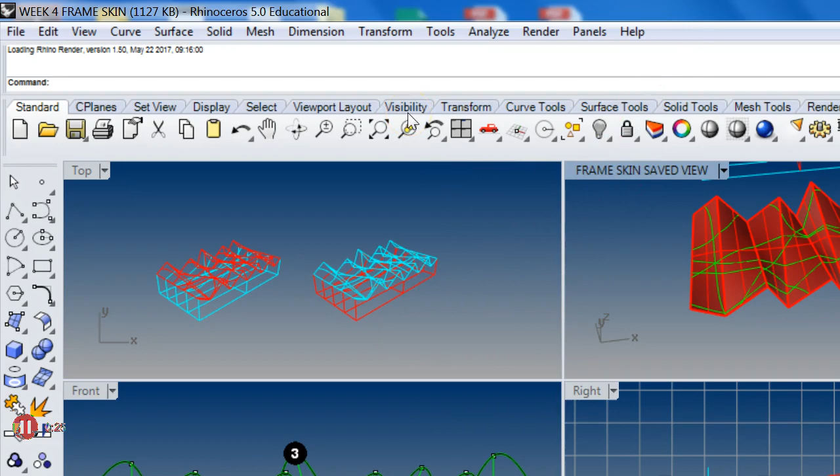All right, so I'm opening back up the file. Let's take a look at the assignment, but what you need to do for Monday is basically, what's due? Page 3, unfolded flat laser cut drawing, kit of parts drawing with labels and numbers showing skin and frame pieces. So I'm going to show you how to do that. It's maybe a bit more involved than it sounds, but we're just going to go through that process again.

There are two things that you need to unroll, right? Where's my frame? Did I hide it? Here it is. We need to unroll this and this. And this we were able to do pretty easily, like that. So I'm going to quickly show you how to unroll something like this.

And unrolling it, flattening it is not the issue, but as my studious student Nicole pointed out, these are intended to slot together. So the intention of digitally fabricating something is that when you're done, you shouldn't be having to use a knife to then cut additionally. You should program all those cuts into your model. And when it's laser cut, you're really just fitting them together.

Did you ever use Lincoln Logs as a kid? You know the game Lincoln Logs? That's why you're all architects, because you played with Lincoln Logs. And your brothers and sisters didn't.

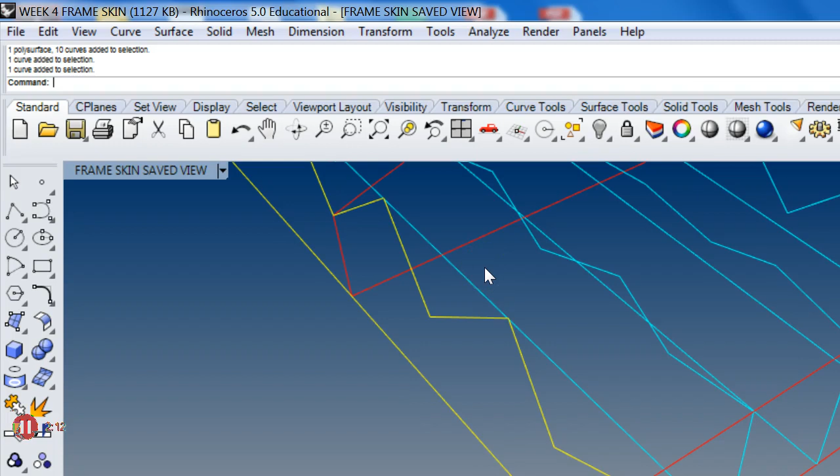Here we go. So these are impossibly thin. These have 0 thickness. What thickness chipboard are you going to use? 16th? So we want to give these some thickness. Let's go to our top view. Okay, two things. We'll go over this again. We'll unroll that one more time. But here, let's copy this over.

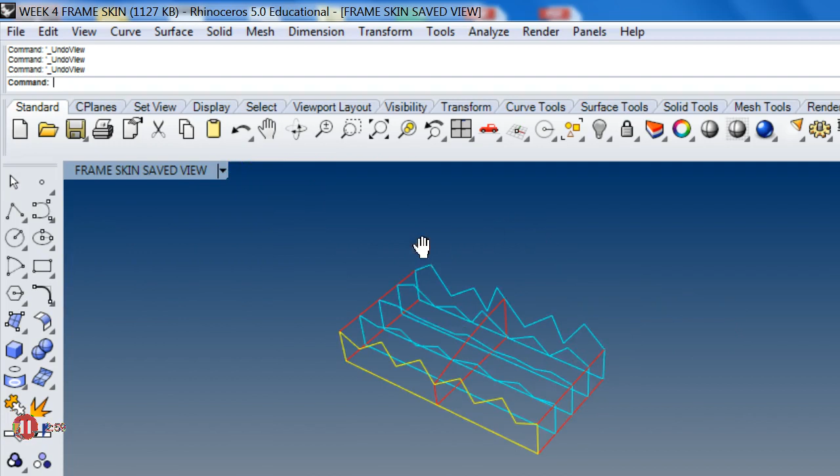And we're going to do two things. One, we're going to give this some thickness. And then we're going to unroll it. I'm going to show you how to notch these things out, like Lincoln Logs. Here we go. All right. So these are currently, I think we made planar surfaces. Remember that? Go to my perspective view. I think we just duplicated the borders, just the boundaries.

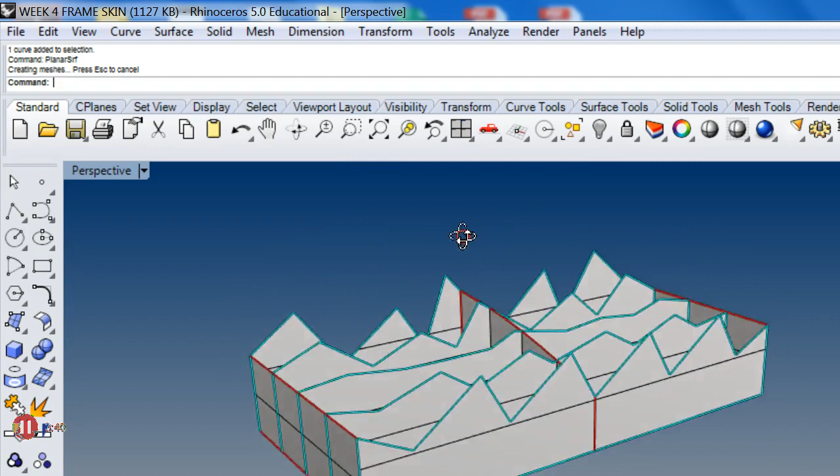How can we get a surface back from a curve? If they're flat, we can type planar surface, right? Because this is a planar curve. Planar. Can you all see it up there? PlanarSrf. Okay. And then I can just repeat each one of these. Okay, something about planar surfaces. So you're going to build a model that looks like that, right? I want to show you something.

Okay, so you can always go back and forth between surfaces and curves, which is a useful thing to do. So here we have a surface, and how can I extract the curves from this? It's two ways of defining the same geometry. So one thing I'm going to do, I don't have to do this, but I'm just going to explode it. And then you see I have these individual segments. And each one of those is like a twisted surface.

What is that called? What's that geometry called? It's fun to say. Let's all say it at the same time. Hyperbolic paraboloids. I didn't hear anyone say it. All right, try it in your free time in your car.

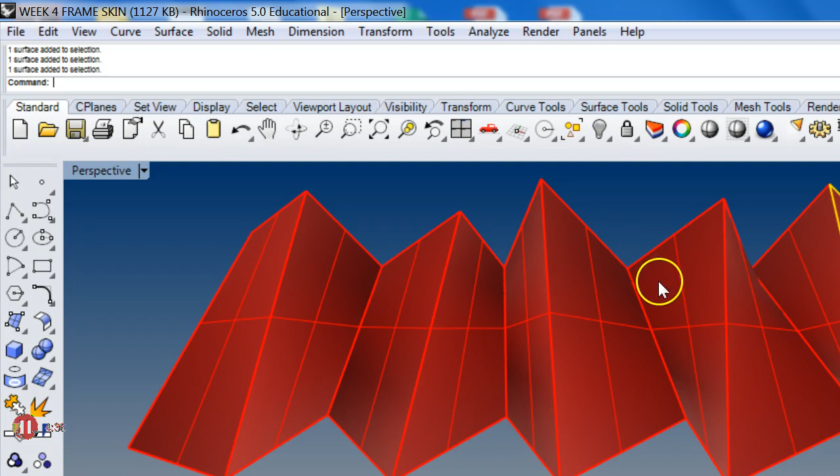All right, look. One way that I can get the curves out of this surface is I can go here. Do you see this surface with a curve and it shows project curves? That's basically your surfaces and curves toolbar. I guess this won't show up in the video. But if you hold it down, you get this menu. Curve from objects. So one, this projects curves on the surfaces.

This pulls a curve from a surface. Here you see duplicate edge. So we're going to use two today called duplicate edge and duplicate border. Let me add them to the assignment. Add some commands down here.

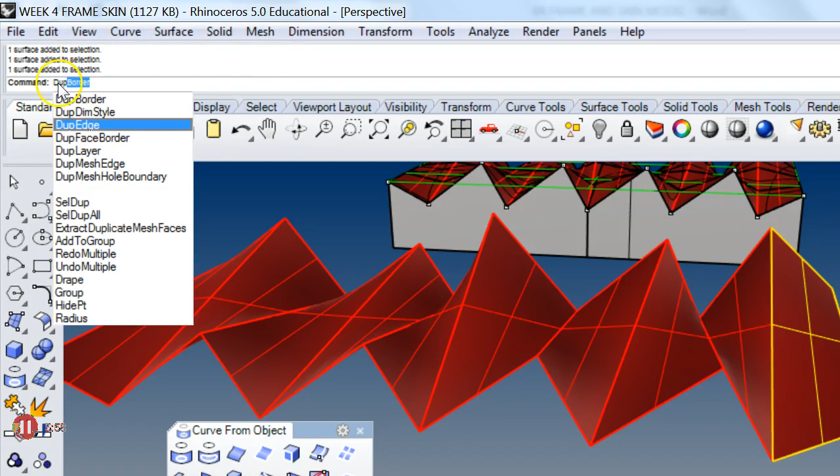Dupe border. Font says Calibri 10. And dupe edge. Dupe edge. Let's make them all caps. Dupe border. Let's make sure. Okay, so if I type, this one is duplicate edge. So let's type dupe. Yeah, see dupe border and dupe edge. Let's try dupe edge. So look, then I click.

I'm selecting these surface edges. What do you notice about these edges? They're all straight, right? They're straight lines. When we unroll them, they become curved, which is a little difficult to comprehend. But so I click those and click enter, and then I can join them. And now I can just delete the surface because it's defined by these edges.

Okay, so the point I wanted to show you is that once you duplicate, so you can do duplicate edge and do one at a time. Click enter, delete the surface. How can I get the surface back using these curves?

Hey Frank, how's everything? Did you staple it? Then it's an excused lateness.

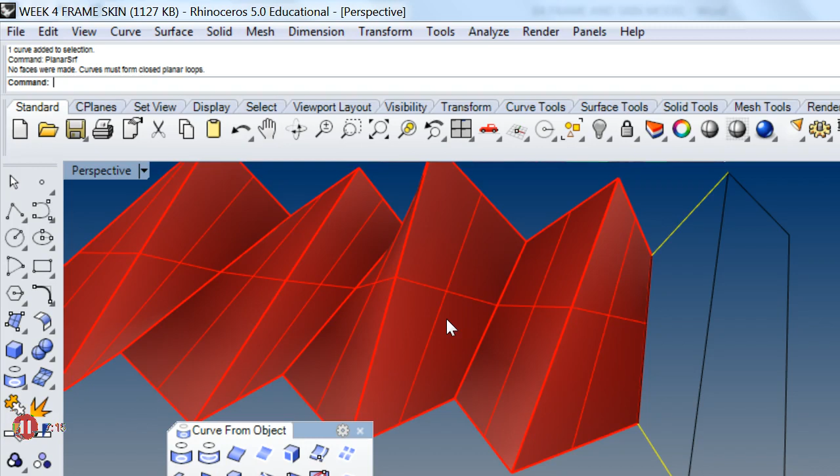How can I get the surface back? Bailey. See, this is what I want to show you. This is not a planar surface. Look, it says no faces were made. Curves must form closed planar. They've got to be flat. So I'm showing you this because in this case, this is a flat curve. This is a three-dimensional surface.

So I can just loft. And look what it's doing. This is what I was trying to duplicate the other day. It's rotating the wrong way. So how can I fix that? I think this is where I can analyze surface direction. It's this command here, analyze direction. So maybe if I flip this one and now try to loft again. Align curves.

Did you see what I did there? If I type loft, it's twisting the wrong way. So if I click align curves, and then I click here, click on that point, it flips them. You see that? If I do it again, it flips them the other way. So if you're having that issue, look, just with curves I can get the surface, and from surface I can get the curves, and I can work back and forth, and I really only need one.

So I'm going to delete this, and I just wanted to illustrate that point, that even if I close the curves, for planar surface, you need a closed boundary. So I'll join them. So look, I have a closed curve, but if I type planar surface, it's not going to work because it's not planar.

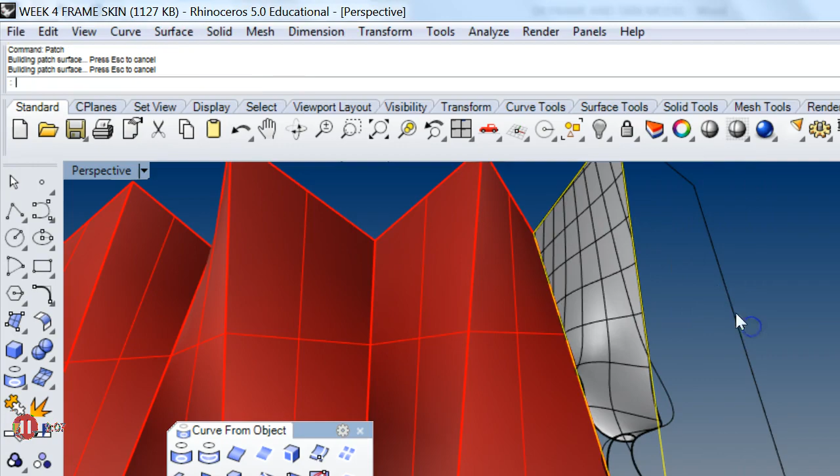There are other commands I can do, such as, I think patch is another command. That seems to be having some problems. You can play with these. Jeez, look at that. How can that possibly be coming from that? I don't know. Don't do patch. Anyway, I just wanted to illustrate that we can use planar curves here, but not necessarily for this other one, even though it's all 1/16-inch chipboard.

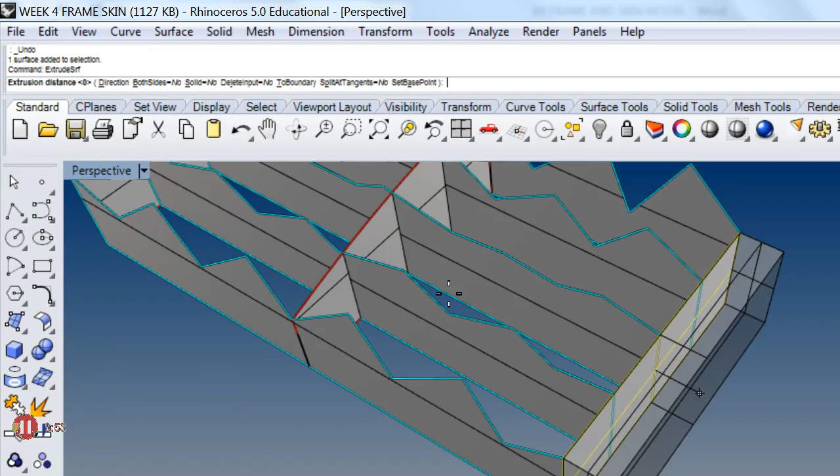All right, so what we want to do here, I want to cut this piece of 1/16-inch chipboard, and I want little notches that this can fit through. So I want to show you how to do that. So I'm going to quickly model the thickness to show you what this is going to look like. So how can I give this thickness? I can extrude surface. ExtrudeSrf. See, I can give it thickness.

And what I'm going to do is offset it in. I can turn on both sides, solid. Let's say yes, it's a solid. And I'm just going to type 1/16 of an inch. It went out, which really is okay, but let's try to get it to go in. Sometimes you need to type negative 1/16 of an inch to get it to go in the other direction. You all see that?

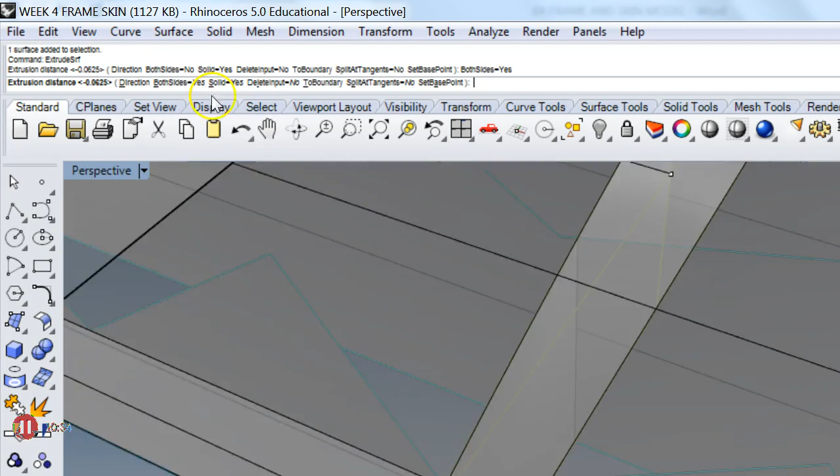Okay. This one, I'm going to extrude surface. What direction do I want to go? I want to go both sides, yeah. Now, I think if I do a 16th, it's going to do it on both sides. So I'm going to do half of a 16th. So I'm going to do 1/32 of an inch. And now I'll measure the thickness of that by typing distance.

D-I-S-T. Yeah, from here to here, it says 0 inches. So my precision is probably set coarser than a 16th of an inch. So if I type units again, shouldn't crash your computer like this. Yeah, my precision, 1/8 of an inch. So I want to go down to maybe 1/64 of an inch. Okay.

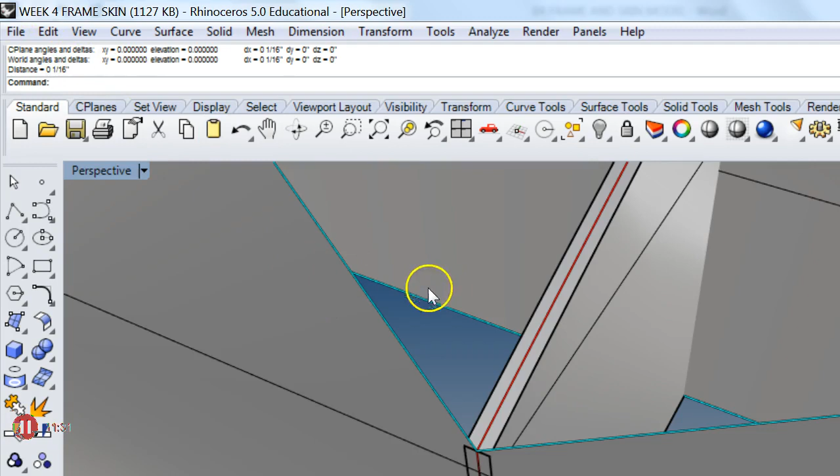Now if I type distance, let's say 16th. Oh, it's only a 16th. So it doesn't duplicate it actually. Oh, yeah, it does. So we want it to be a 16th of an inch. All right, and then this one will offset in, extrude surface. We can click on both to turn that off, so it's just going one direction. And then usually if you just lead it in the right direction and type the dimension, it'll do that. All right, so these have thickness. Let's do the same thing here.

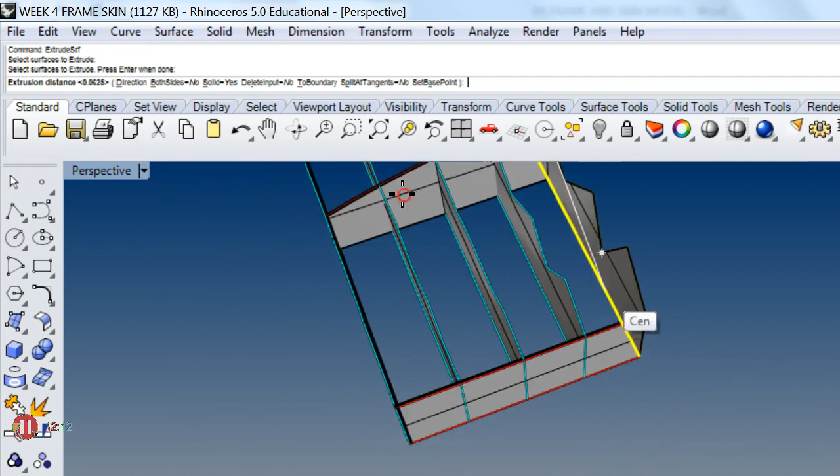1/16 of an inch. And again, it's a bad habit, but once you do a command, if you just hit enter again, it'll repeat the command. So you don't have to type extrude surface every time, but I should probably just say it for the video. And look, one thing, it offset the wrong direction. So I can either redo it or I can just grab this and move it over.

Yeah. And then these, maybe I just want to keep them on their center lines and extrude in both directions. So let's do extrude surface. And type both. And then I'll do a 1/32 of an inch on either side. And then I can select and click enter, enter. Okay? So do you understand the issue now?

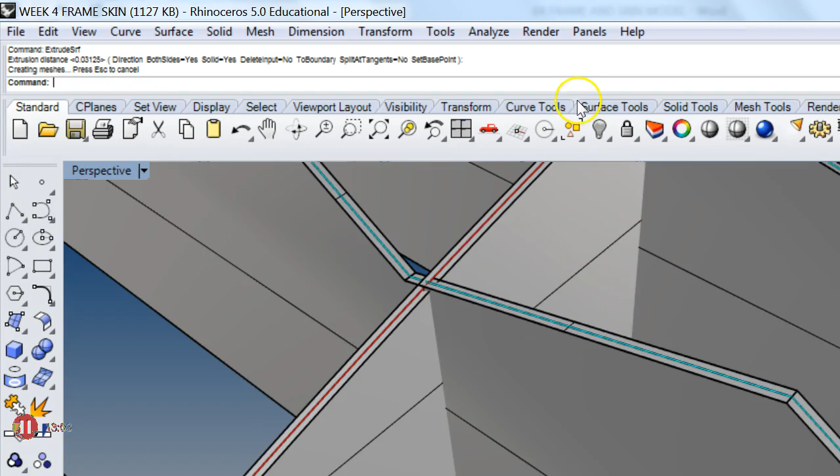I want this. I don't want to have to come with my scissors and cut and then measure a 1/16 of an inch and slice that off and then put it back together. Of course, that is how you would do it by hand. And there's nothing wrong with that. I recommend working with a combination of digital and analog methods. But let me show you a project. Have any of you seen

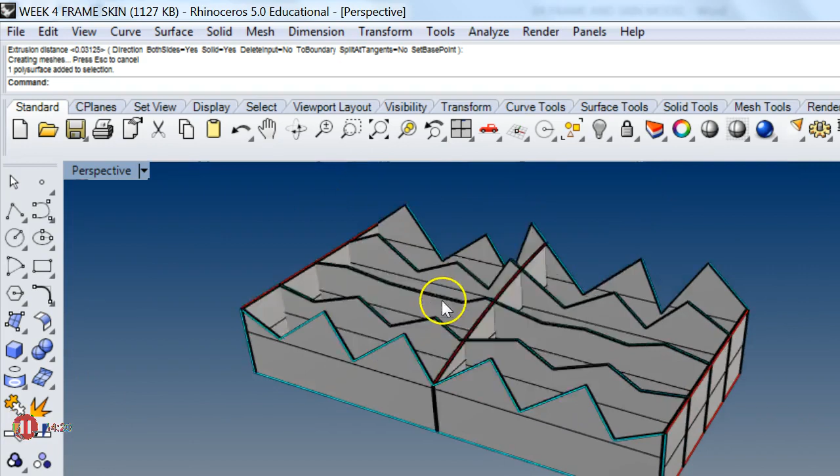So this is what we need to do. And one way to do this is, now we need to use a tool. Right, now that these are overlapping, we want these to overlap. I can either operate on this like this, and I'm going to copy and paste this. So this is the thick version, and then this is the thin version. I'm going to delete the poly surfaces so that I'm left with the two-dimensional surfaces.

I'm beginning to think of this class a little bit like some people wake up and do the morning crossword puzzle. You just wake up and do the digital fabrication puzzle. It's a good way to start the day.

Okay? So here's the thin version, here's the thick version. And so one thing we can do is, in this case, if we select two surfaces like this and type intersect, see, that is all the overlapping material. So I want to notch out some of that. And I can either

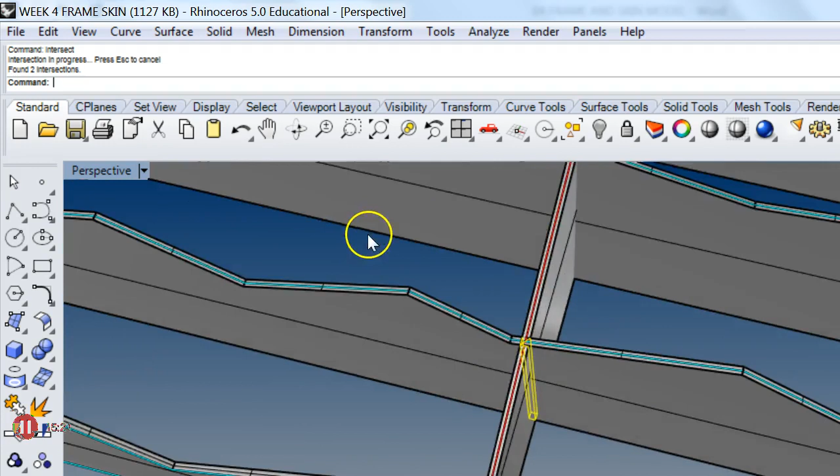here I'm deleting because I've got two surfaces. I have the surface and then the extruded surface with the thickness. And I'm going to try to get rid of some overlapping things. Okay, so I intersected those, so I have this intersected line here. One thing I can do is I can go through and type a command, there are Boolean tools. Are you familiar with Boolean tools? What is a Boolean? What's a Boolean statement?

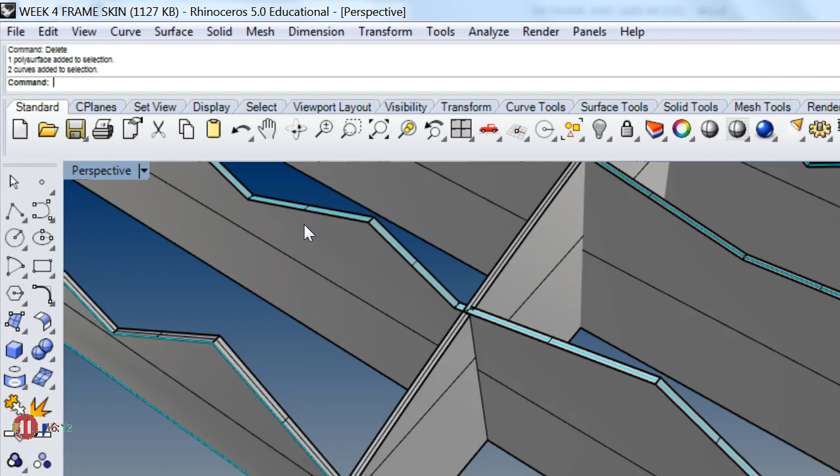In computation and in mathematics, Boolean operations are true-false statements. So if I do something like this, I think I showed this on the first day. If I do that, and then I do this, and I type Boolean, yes, please. Right, this subtracts from that. That's Boolean difference. And so what I may want to do in this case is use one to subtract from the other.

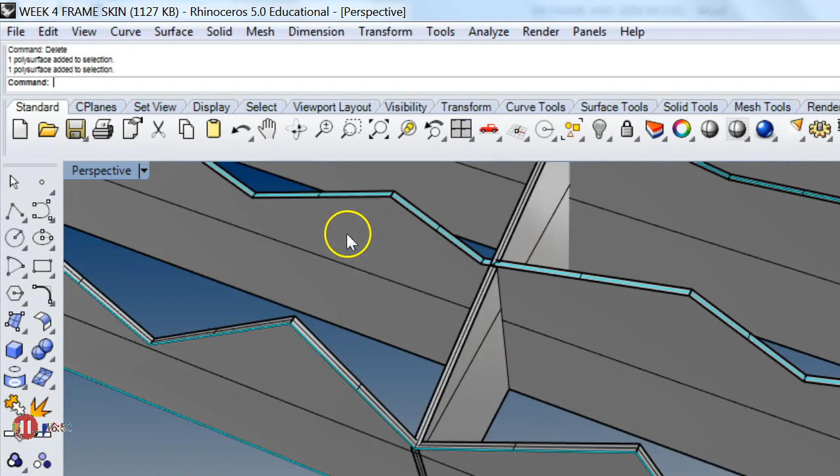And really I want to use either one to subtract from the other. So let's try Boolean difference. I'm going to subtract from this surface with this one, and then click enter. Didn't work. Let's try it again. Subtract from this one, enter. There we go. So I can do that. And what I may want to do, since it disappears, is I could copy and paste this.

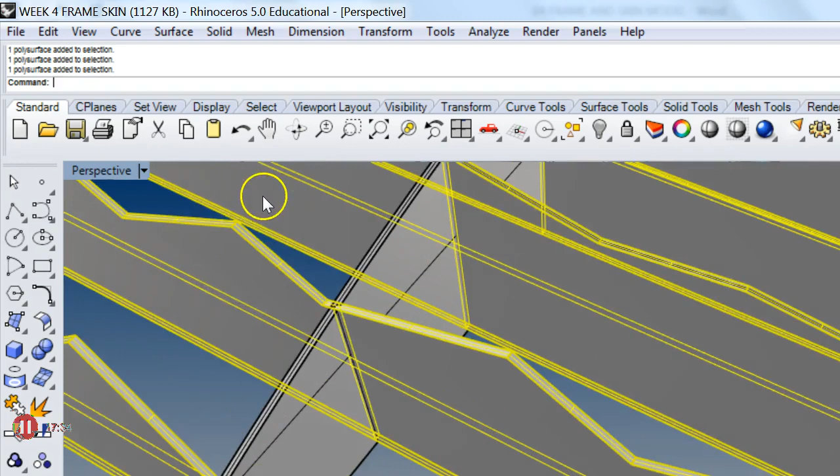Remember last week I showed you how to quickly hide things so you don't have to try to select overlapping objects? So I'm selecting the thick ones, hiding them, and then I'm going to delete all of this and unhide them, so I only have thick surfaces here.

I'm going to copy this again. So what I'm going to do is use the long ones to subtract from the short ones, and then use the short ones to subtract from the long ones, and then reconnect them.

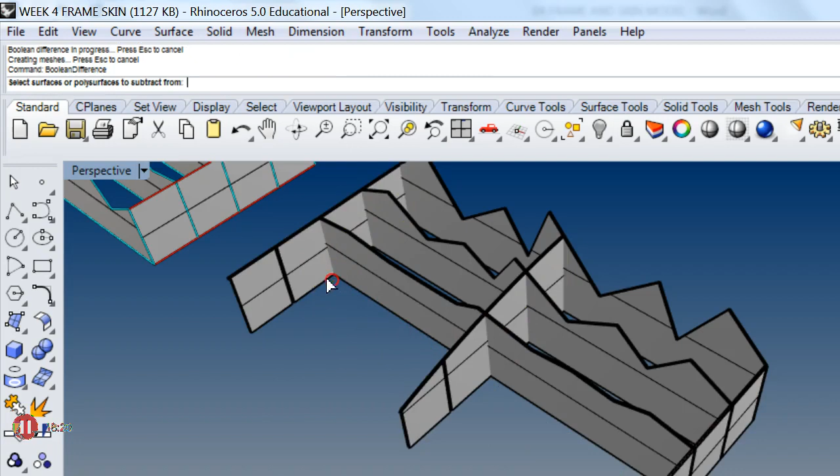I'm going to type Boolean difference. I want to subtract from this one, and this one. Enter, using this. Okay, we'll do it again. This one, and this one, using this one. Again, this one, and this one, using this one.

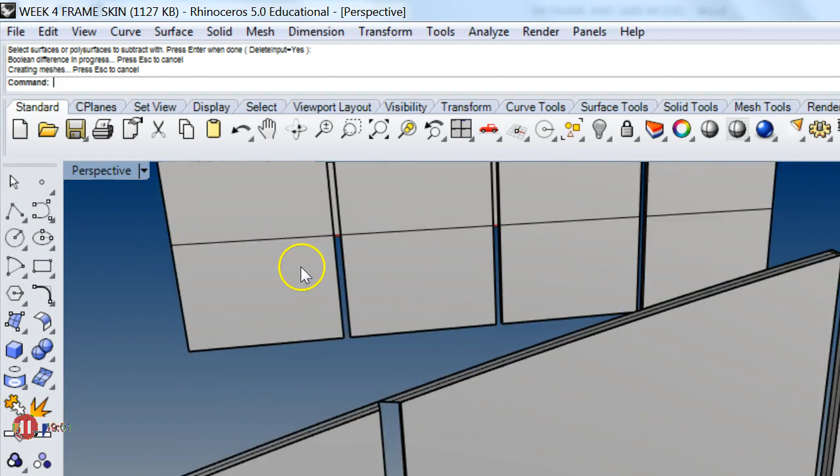One more time. This one, enter. Surface subtract with this one. There we go. One more time. Boolean difference. Select surfaces to subtract from, here, here, and here. Enter. Surface to subtract with this one. Enter. Okay, now if I look at these, there's a little bit of weirdness where this thing is barely glancing these things.

Now I'm going to come here just to illustrate this, but I'm going to do it two more ways after this, so bear with me. I'm going to do Boolean difference. Now I want to subtract from here. I could do this all at once. So I want to subtract from these, subtract with these.

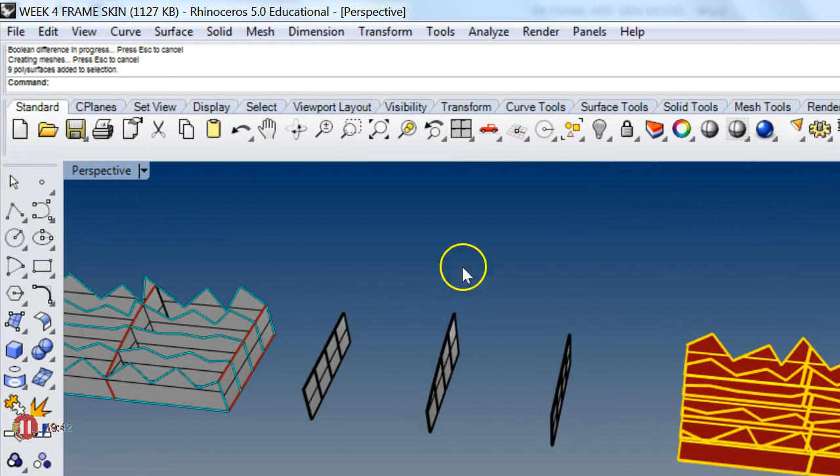Believe it or not, it worked. It just might not look like it. Okay, so let's turn these red, turn these green. And now let's try to put them back together.

I'm going to group these because these are now separate objects. So I'm going to select them and type group, so I select them and they all move. And I'm going to copy them.

There, I've lined it up. So do you see that these more or less are notched to fit? And so that is a way to model it.

It doesn't fit. What in the world? Let's try this again. I think this is supposed to go here. No.

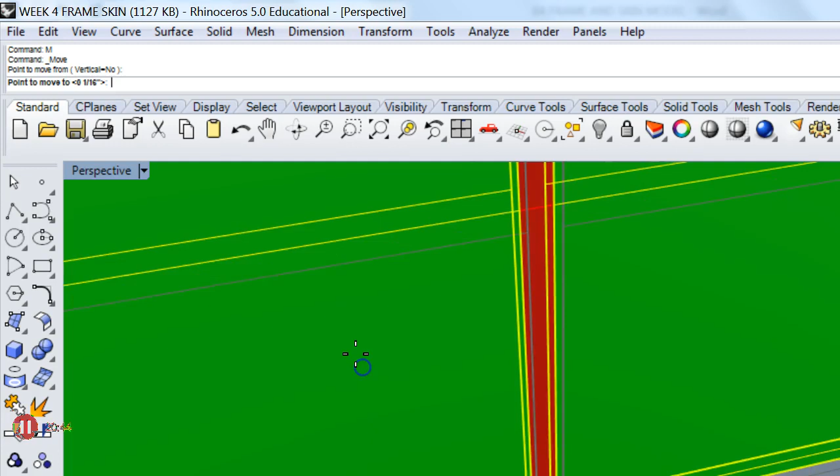Okay, this looks correct here. Why is this happening? What happened? Did I really? And then this one should be here.

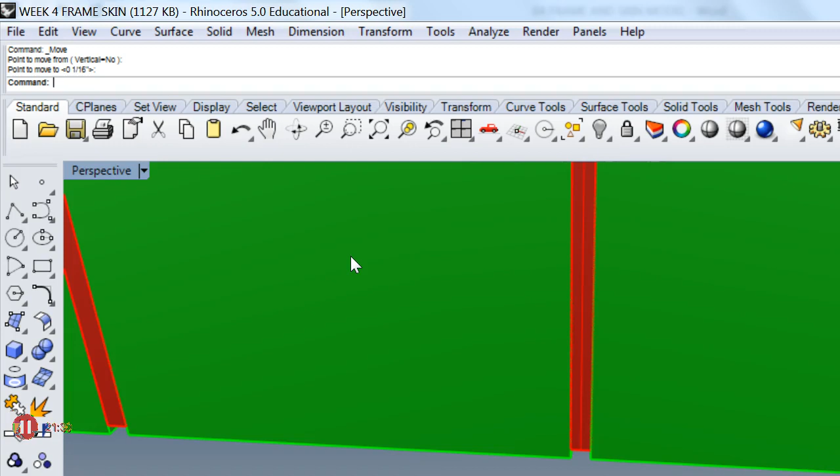All right, that looks correct. What did I do, Nicole? I did? Are you sure?

Who agrees with Nicole? What did I do? I'll just do it again. What'd you say? I took away from both of them.

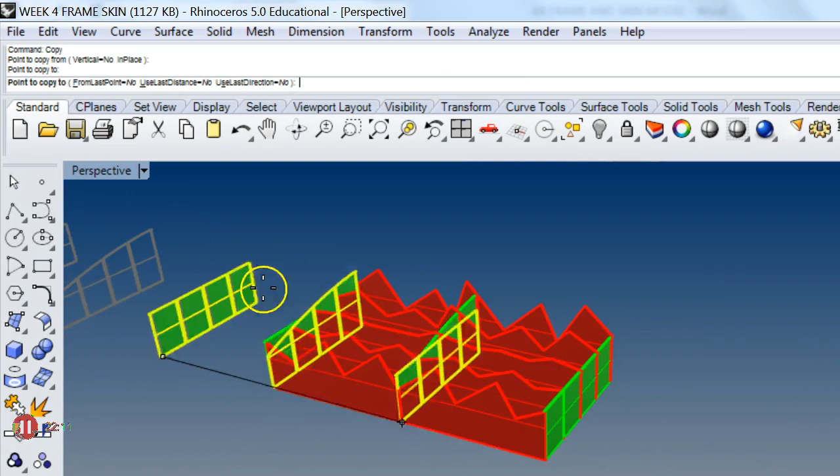Oh, I see. Oh, you're right, that makes sense. So I should just line up the middle. So I really kind of messed it up. Listen,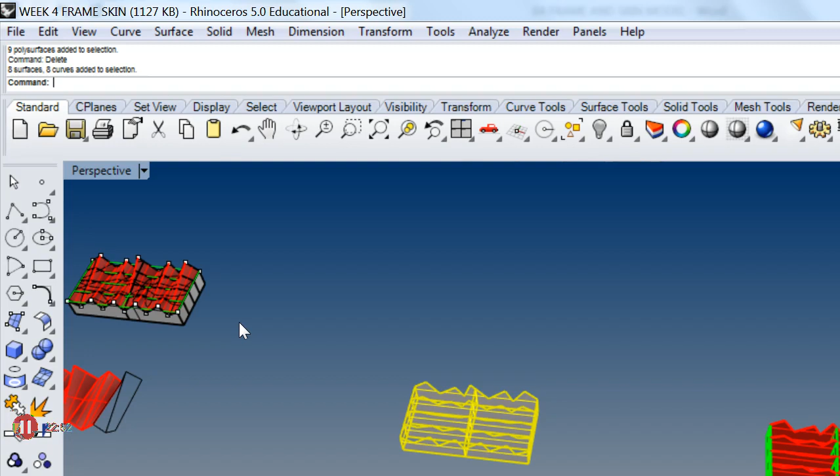Okay, you know what I'm going to say, guys? Don't do it this way, it doesn't make a lot of sense. I'm going to show you another way to do it. In principle, you can do that, but I was showing it to you only to show you that you could model it in this way. That's not the most useful way of actually doing this, and I'm going to show you two additional ways.

One is pretty simple, and that is to really deal with these in terms of keeping them as flat surfaces, and you don't really need to model it. But if you want to do your Make2D and show material thickness—when you model things, they always look inherently sketchy and undercooked until you give surfaces thicknesses. Just like if you draw a section with a zero thickness line, it doesn't look developed or convincing. So do give surfaces thicknesses, and I was trying to show you how to model it.

I'm going to do this two more ways: one with them as a zero thickness surface, and then I'm going to come back and do it another way to show you a pretty straightforward way of doing this. So the first thing I'm going to do is leave this as is.

Let's change the colors again so we can easily follow it. Okay, we'll make the short members green. And now we're going to do the same exercise. So copy these down.

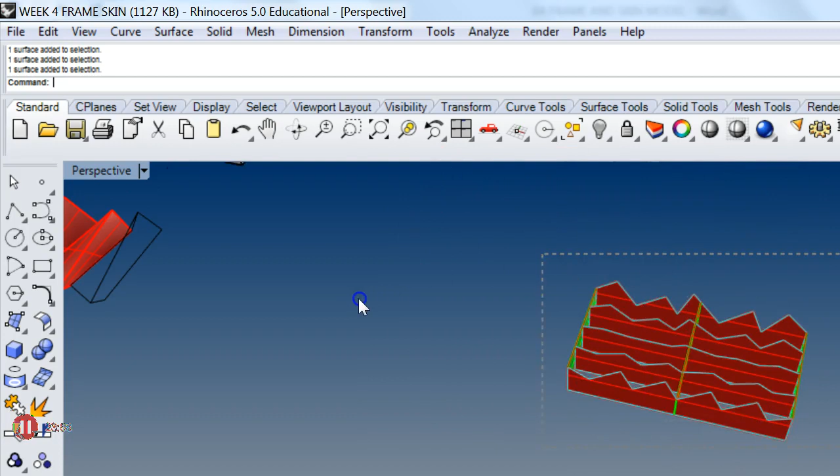I'm going to select the surfaces here because I've got curves and surfaces here. I don't want the curves anymore. I can get them back, right? I should be able to get them back. So now just surfaces, so if I click, I'm not having to toggle between surfaces and curves. All right, now using this, what was the first thing I needed to do?

How do I mark where this one meets this one? What is it? Intersect, that's right. So I'm going to take these and intersect everything. Let's try this - intersect objects, intersect all of them.

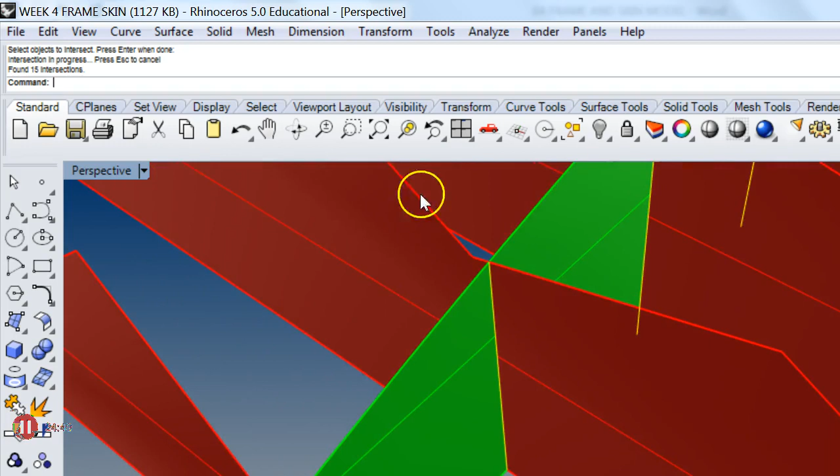Select them all, type enter. And then if you look, you see a yellow line that shows up. Okay? And then here you see a yellow line too. See that line, curve, it stays there.

So now when I take this curve, I'm just going to duplicate it. I'm going to start duplicating faces or surfaces and laying them down to prep my laser cutter file. So I'm just going to copy one at a time.

Let's use the text tool to label these here. Text. A. Oh, that's big. Heights - let's do 1 inch, let's do half an inch.

Okay, oh jeez, look at that. We 3D print these labels, so I have them as solids. Let's just do curves instead.

A, B, C, D, and E. Okay, so these are - geez.

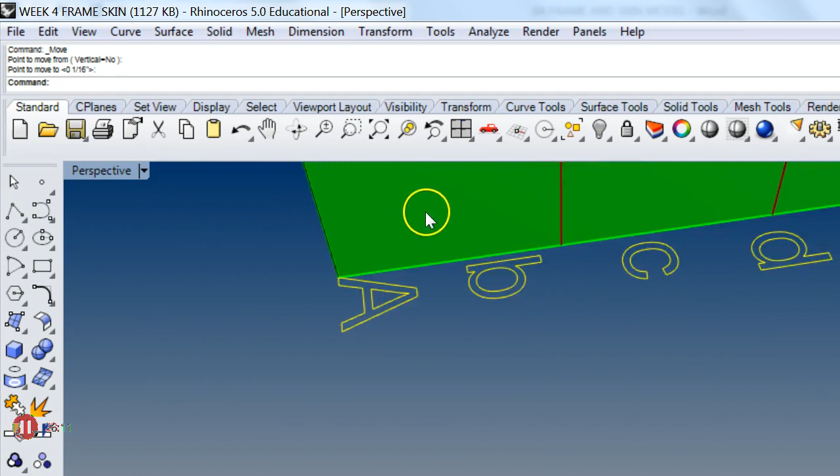Okay, be careful when you're moving things in 3 dimensions. So I'm going to move them over. Okay, A, B, C, D, and E.

We'll number these 1, 2, 3. All right, text - 1, 2, 3.

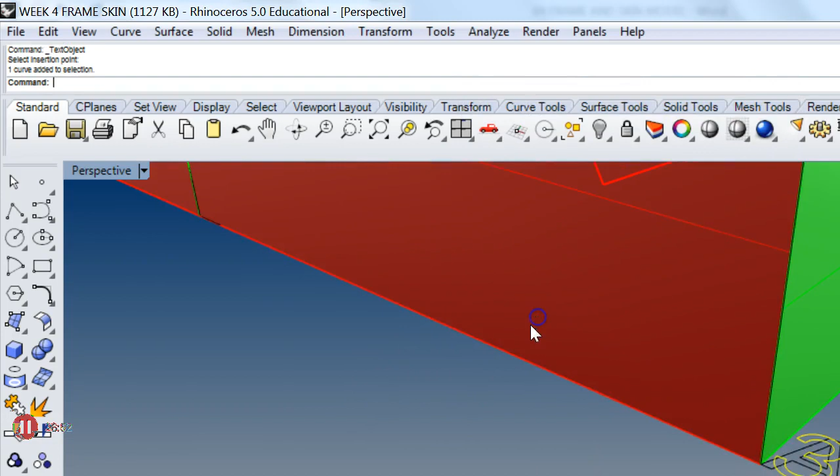Okay, now come back here and move them over. Where's my number? These are more or less just like modeling notes, so you can identify these later.

So let's take A and go lay it down. What I'm going to do is select A, and I'm also going to select this curve. If I hold down Shift and select, it's going to select the curve as well. So I'm going to drag this over - I probably want to drag the letter with it.

I'm going to group the different parts of letter A, and bring this over here. Now I'm just going to 3D rotate it flat, right? Okay, I'll just do this one at a time.

So you can see the surface, and you can see the score mark where the other one is going to intersect it. Which one is intersecting it there? Number 2 - so I might bring this over to label. In this case it's pretty straightforward, 1, 2, and 3.

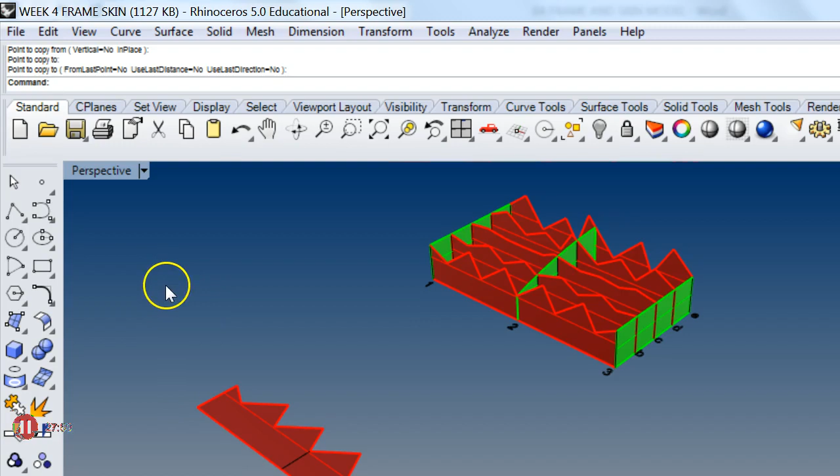Although you might get them mixed - you might have this as 1, 2, and 3. So it is semi-important to label these as you go.

And this is more important when you're doing something like this, and you've got 1 through 67, and you need to match rib 67 with rib XXZ, right? Because you have so many letters in the opposite direction.

So I do think it's useful to kind of bring all of this with it. You may even want to score these numbers into the part. So this is rib A, and this is 1, 2, 3.

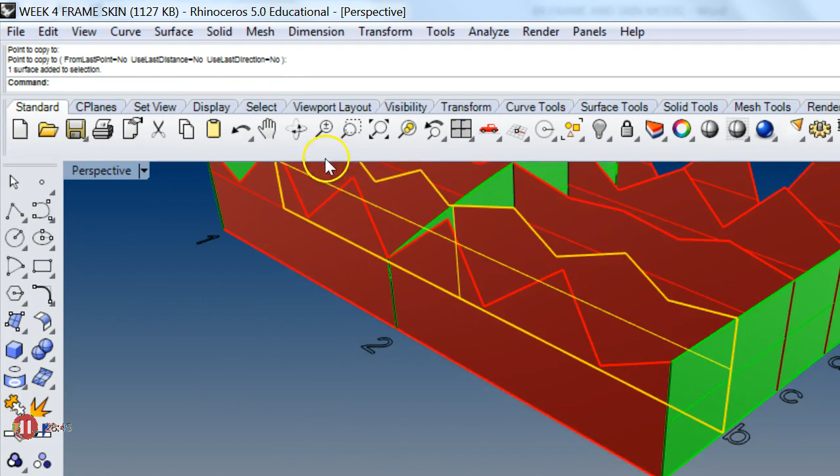I wanted to copy this, not take it. Okay, now we're going to take B. So I'm going to select B, and then hold down Shift.

And I also want to select that curve in the middle, and then the surface, and then also B. I'm going to select this and 3D rotate it flat.

Okay, continue along - I'm going to take C. Hold down Shift, select that line in the middle. Just going to do it for C, D, and E.

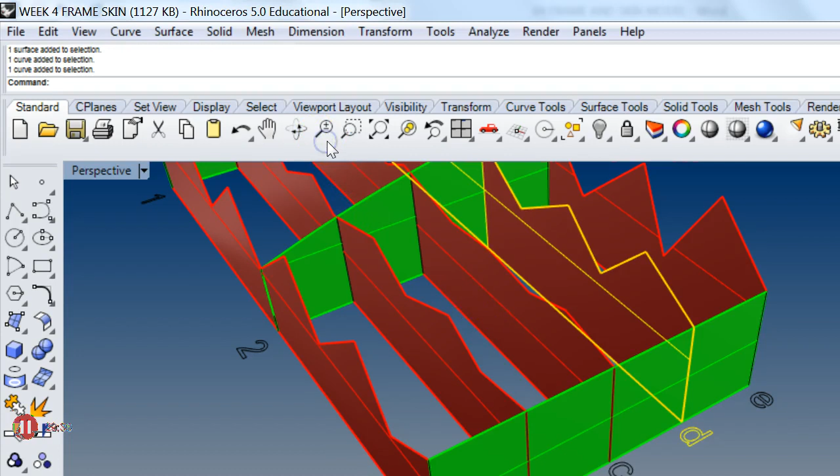Is there a line here? Maybe select the line first. Why can't I select it? I see it there - there it is.

Shift, hold this down. Okay, here's E.

Alright, now I'm going to come in here. I'm going to select this. I'm going to 3D rotate it.

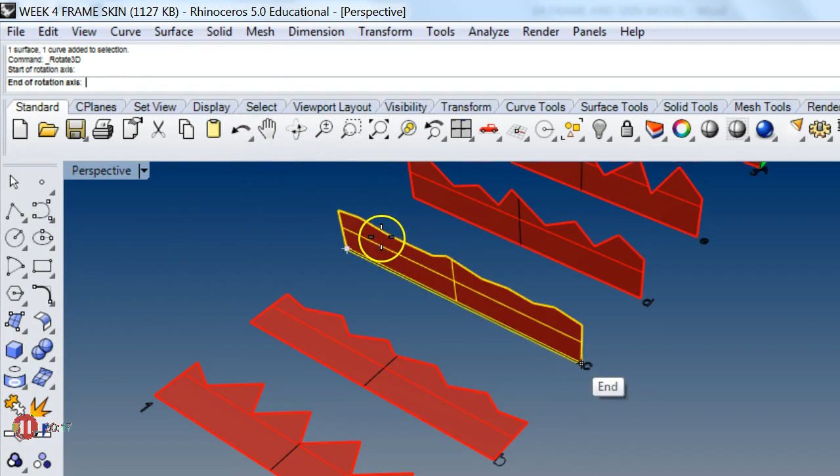Okay, so those are my score marks. Now I want to do it with 1, 2, and 3. All right, so this is a little more challenging.

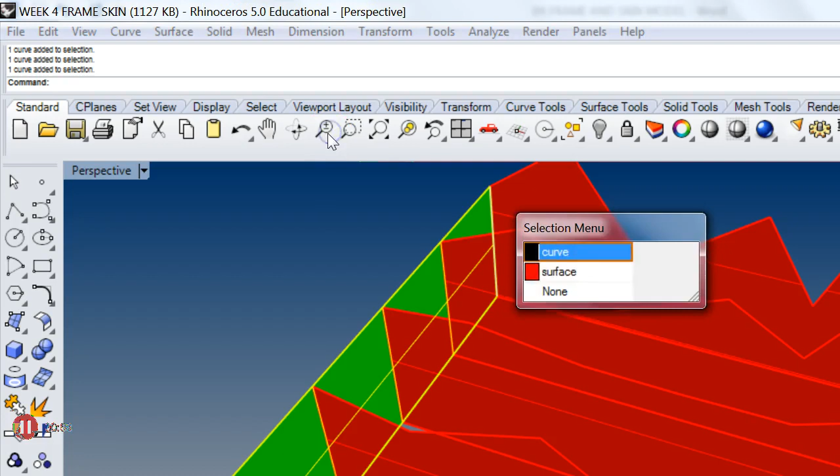I'm going to change the view to maybe X-ray so it's easier to see when I select the curves. Okay, so we're going to take number 1 - obviously it's on the edge - and then I'm going to select this curve, this curve, this curve, and the edge. You can select the curves on the edge, and the number 1.

I'm going to drag it this way. Here's number 1, and I recommend that you maybe take the letters. Okay, and I'm going to 3D rotate this flat. All right, so that's where B hits 1.

Okay, we're going to do the same thing for number 2. Select it, select the curve, and select the surface. Copy it over. Rotate it.

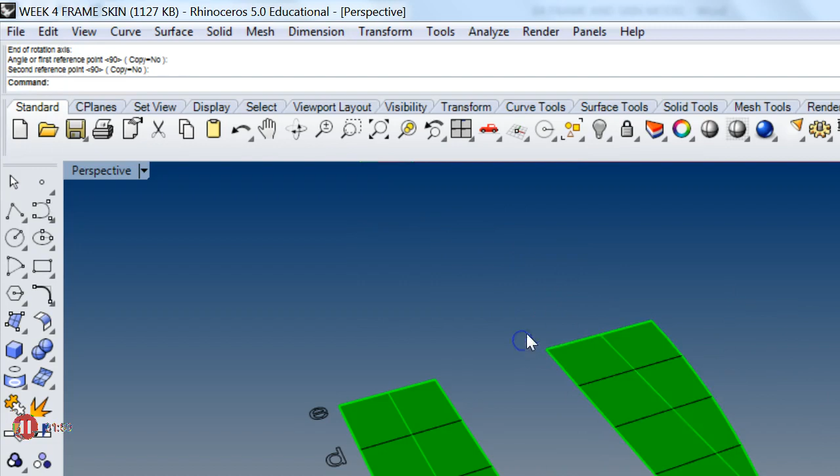Okay, now the end - rib 3. Select that curve, this curve, this curve. Okay, now I'm going to copy this over.

There's number 3. Keep the number on the bottom.

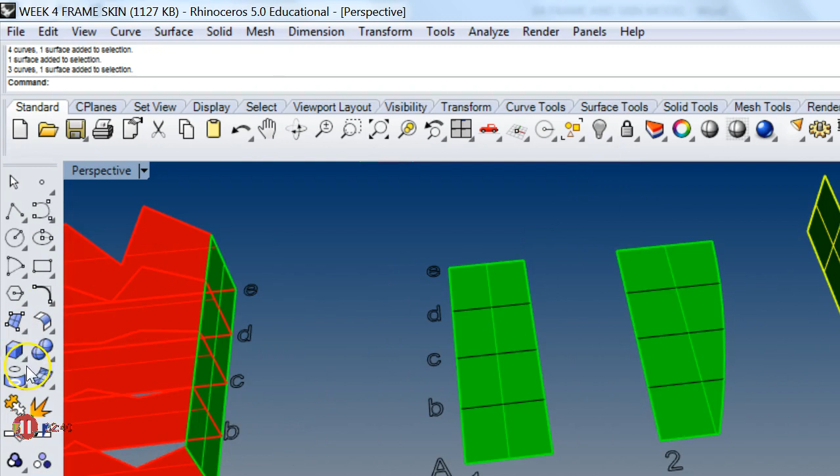Here's what I want to do, guys. What's important is, if I have 2 surfaces that I want to slot together, I don't want to notch completely out, or each piece will fall apart. So I want to take half from the bottom. These 2 pieces go together - take out half from the bottom of one and half from the top of the other so they slot together and lock where you want them to go. Does that make sense? Let me show you. So if these are our bottoms, A, B, C, D, and E, this is the bottom.

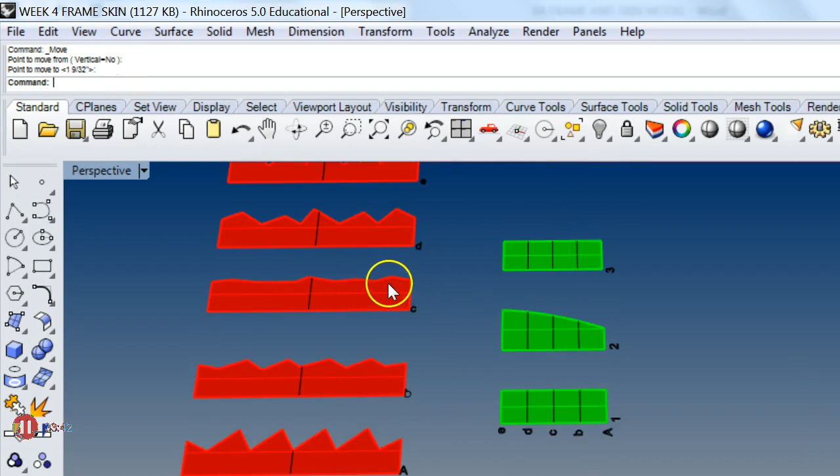Now that I've got this, I could come down here, copy it down, and rotate these so that the bottom sits where the bottom should be. So, A, B, C, D, and E.

So what I want to do: I'm going to take all the long members and subtract from the bottom, and all of the cross members I'm going to subtract from the top. Let me show you what that means.

To do that, all I'm really going to do is draw to the midpoint. Make sure your snaps are turned on and you're drawing to the midpoint. I'm going to draw from here to here and then over. I want to subtract from the bottom of that. How wide of a notch do I want? 1/16 of an inch, so my 16th inch material fits there.

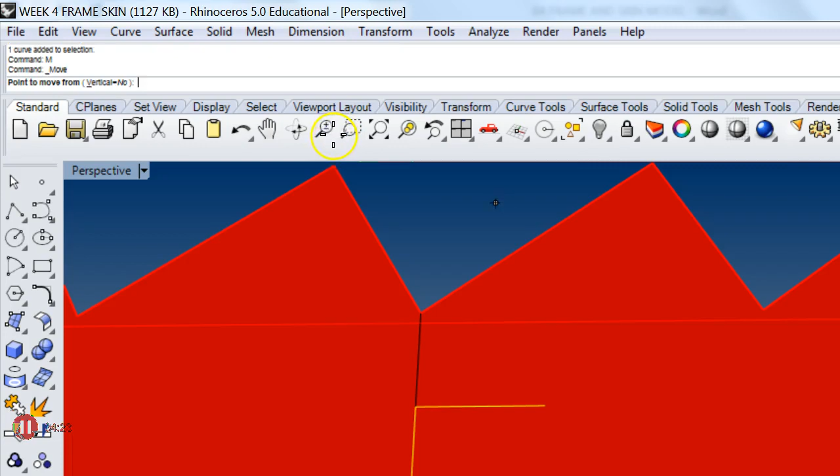One way to do that is to draw this, and then offset - if I want a 16th, I can offset a 32nd of an inch on either side. So I want to subtract all of this. Now I can draw a frame - that's what I want to subtract.

And I can just now type trim. Cutting objects is this, and I can select that. See that? That is going to slot nicely together.

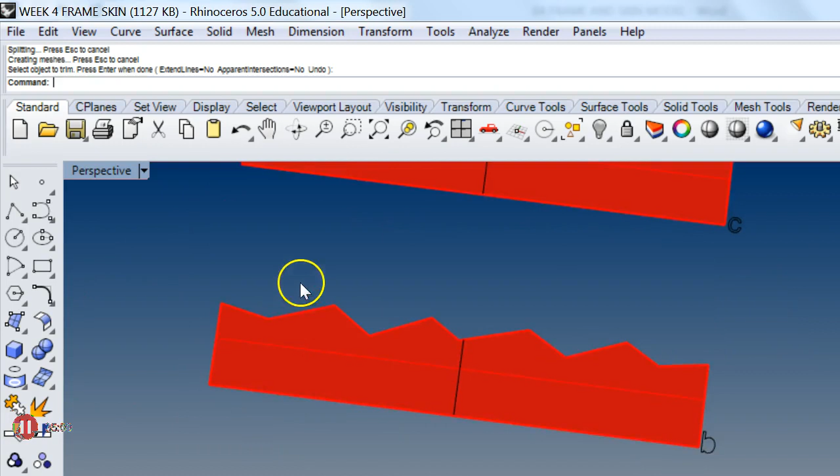So I'm going to do the same thing here. You're going to need to redefine the midpoint at each section because this is slightly lower than this - if you look at the section of that thing heading through the middle, it's getting taller towards the back. Do you see that?

Make sure you have your midpoint turned on. Just snap to it as an indicator and then offset the midpoint - this middle rib is a 32nd. Now draw your rectangle, and then trim.

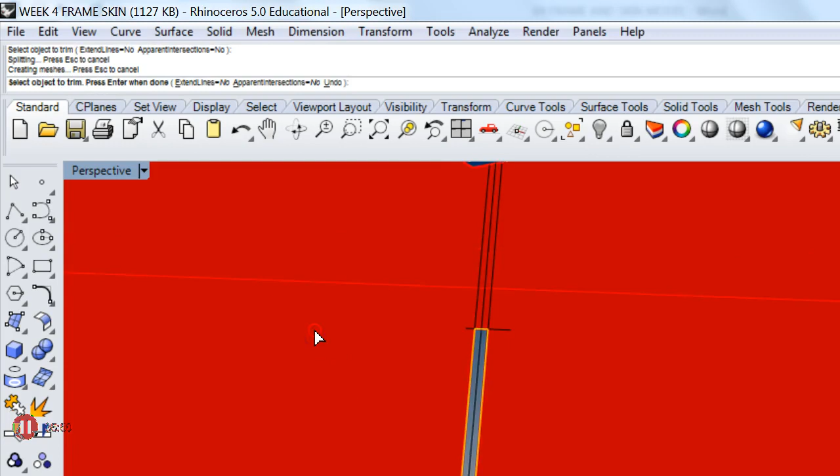Use that as your cutting object and then select. Come through and do each one, do it a few times. I like to type polyline, snap to the midpoint, draw it over, and then grab it and put the midpoint on the line so that when you offset...

Offset a 32nd on each side, draw a new rectangle, then trim using that rectangle. You can see how this could take a very long time for something like that, right? But it's your first attempt, so let's do this. There are some automated tools I'll show you later, but let's just do this manually for now. I still tend to do this manually.

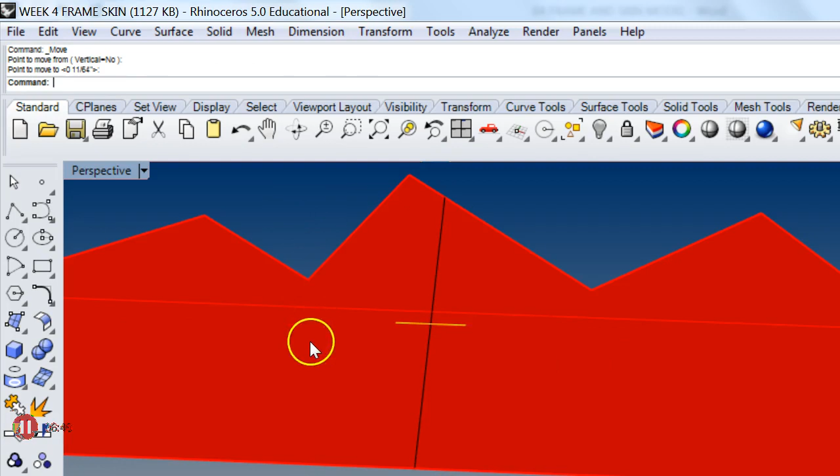Trim - this rectangle is my cutting object. Okay, one more. Polyline, draw it to the midpoint, move it over.

There you go. Now we could really delete the curves, just to illustrate what it is. You all see this?

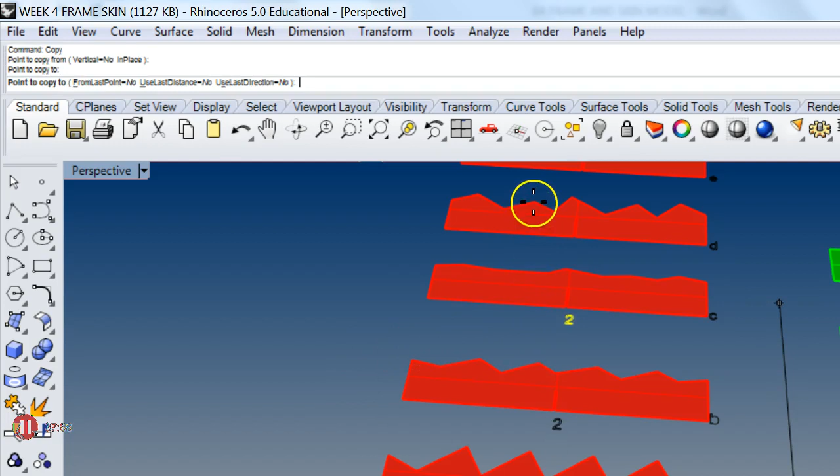All right, and we may want to copy the number 2, so we know that's the number 2 rib where it intersects. So let's go work on the number 2 rib. These we subtracted from the bottom of here, so it's going to slot down on top of the 2. So we want to notch out of the top of the 2, all right? Let's do the same thing.

Let's draw a polyline and just mark the midpoints. Keep in mind, the midpoints are not uniform, because these are different heights. So let's draw them, move this over. Now we want to subtract the top half of each intersection, so we're going to offset a 32nd of an inch on either side. We can just go through and do it.

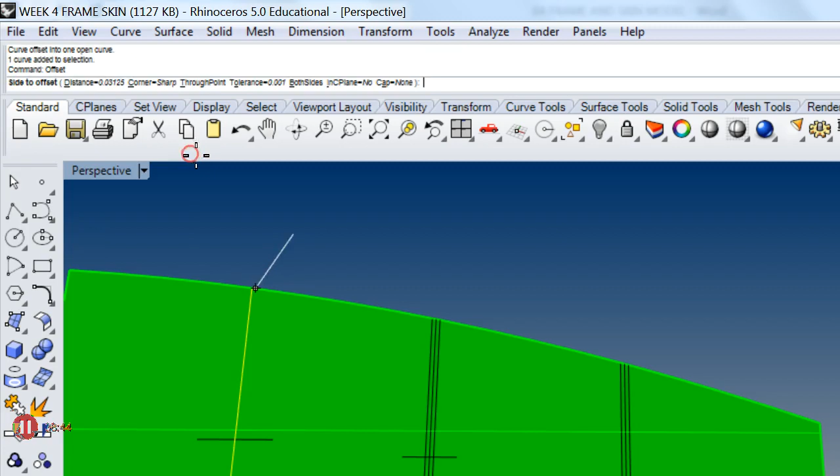Okay, now I'm going to draw a rectangle.

Okay. And now I'm going to just use the trim tool. And I'm going to select these rectangles that I drew to notch out. You see it's missing a little bit here, because this is not a straight edge like these were. It's not overlapping all the way. So I may want to either extend this curve, just move it down a little to be sure that I'm

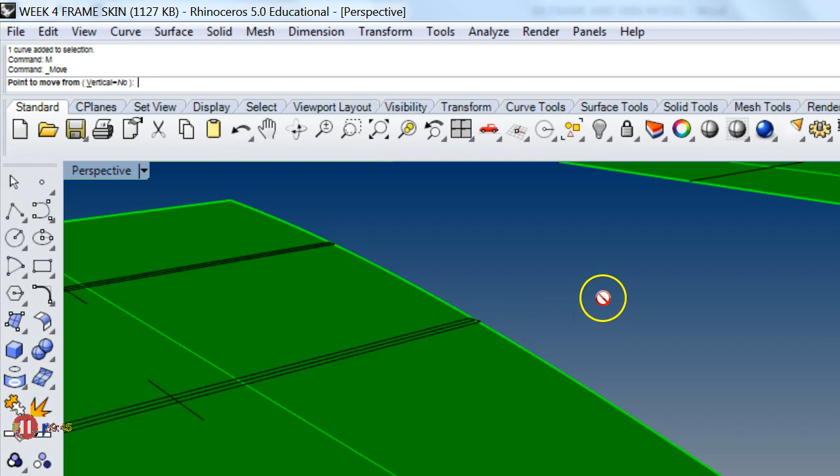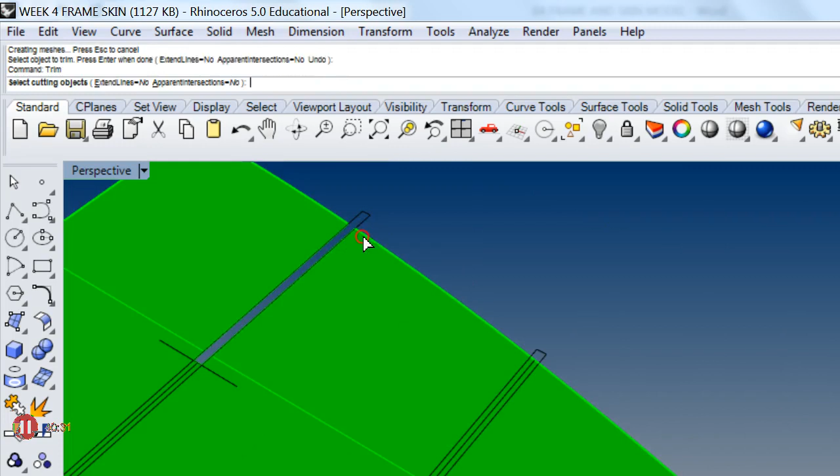type move this, staying snap to grid. I'm not shifting the orientation. I'm going to redraw these rectangles. Okay. All right. I'm going to take this, I'm going to draw it there, so it overlaps the edge well beyond where I need to cut. This will avoid all those strange triangular interstitial spaces. So trim, rectangle, trim, trim.

All right. I can delete all these. So I would almost recommend you do it like that. It takes a little more time, but for instance,

What does the timer mean?

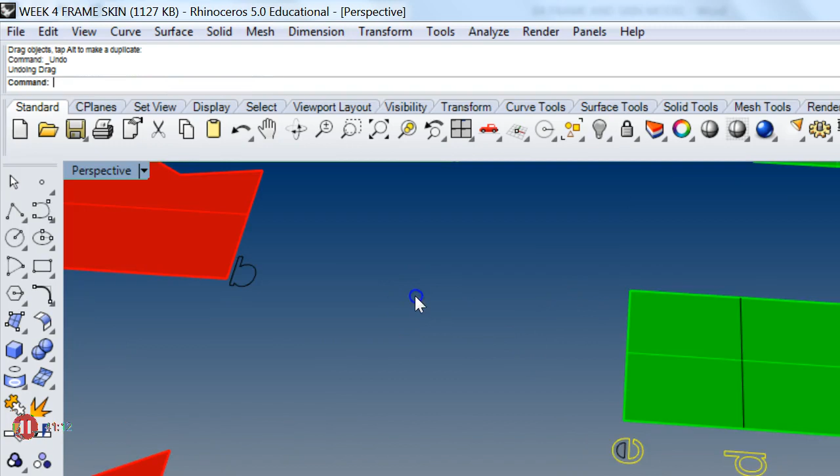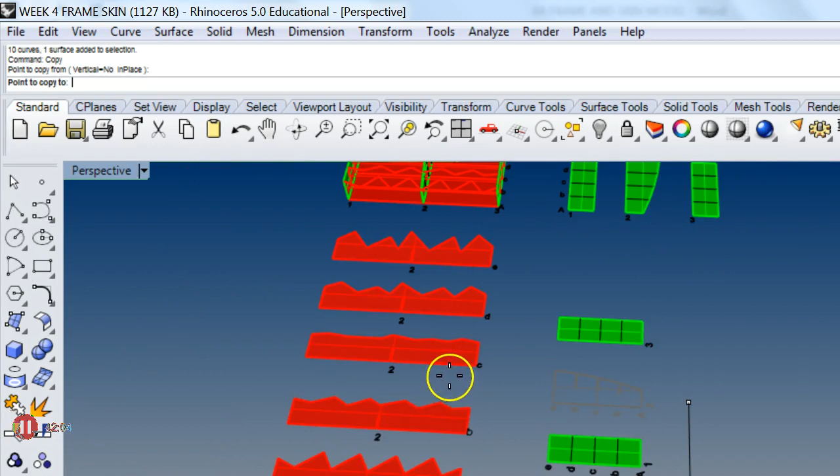All right, I'm going to select these and copy them over. Okay, so now I know, for instance, number 2, let's insert, so C, let's move these over and actually try to assemble them to simulate what they're going to look like. Okay, so here's C, here's number 2, and this is, sorry. Here's number 2. I'm going to move it down here, 3D rotate it up into space.

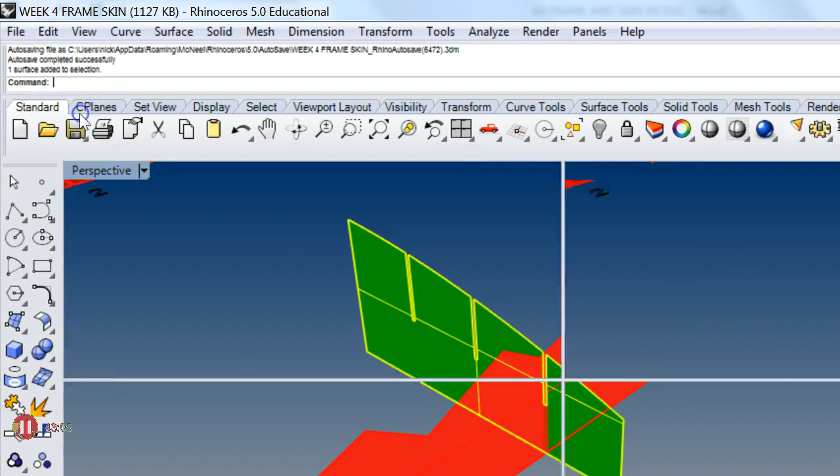Okay, now let's start with, let's do B, C, and D. I'm going to bring B. All right, so the midpoint of, this is B, remember, sits here. So if I snap to the middle of this cut, I should be able to put it right there. See how that will work? Watch as I'll move it. Okay, watch it here. See that?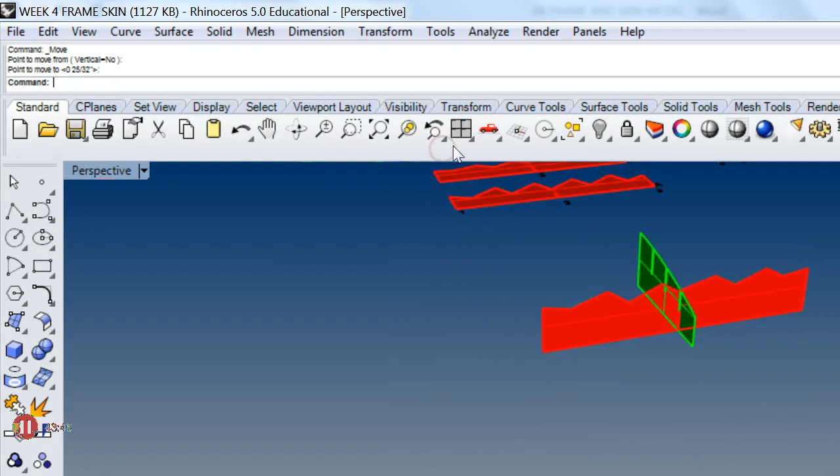So for the purpose of fabricating it, I don't really need to model the thickness, because in the end, if I were 3D printing it, yes, but I'm laser cutting, so I'm only really representing surfaces in 2 dimensions. So this will be sufficient, and then you'll see the thickness of this thing is actually a 16th, so you've got a 16th inch clearance there. I do think it would be useful for you to go through and actually model all these slots and then tip it up and assemble it virtually and then laser cut it.

You know, we could easily go through and put, let's put C in position there. So let's 3D rotate it. This is C. And this is why it's important to keep track of which notch is which.

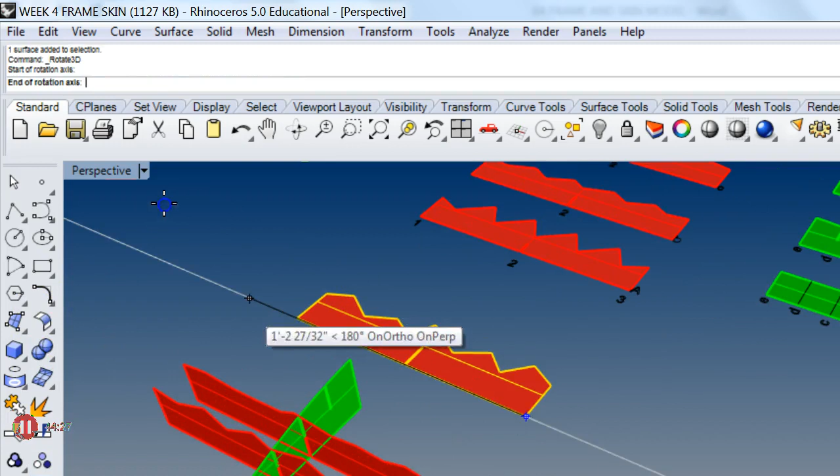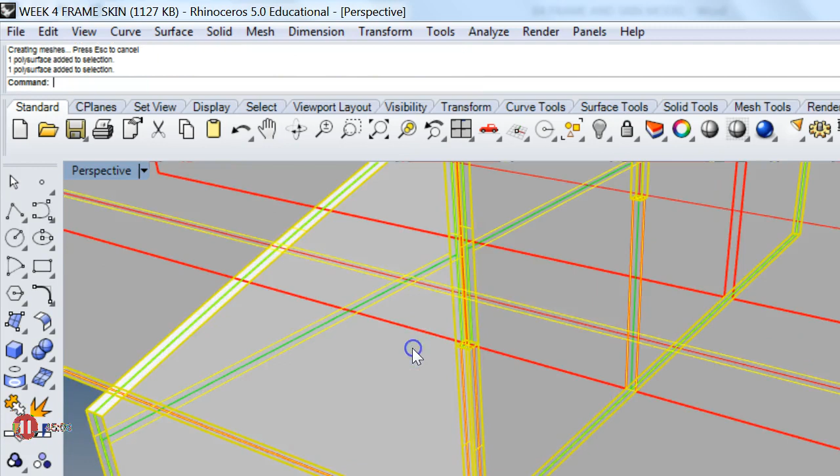All right, and then beyond that, now we could come in here and to illustrate this point, we could do extrude surface. Extrude surface. Let's go both directions, and we could do 1/32 of an inch. And so you see now this rib has the thickness and the notch built into it. You all see that? We do the same thing here. Okay. So now this and this actually have that. So you could now, for instance, 3D print those pieces and they would fit together. Yeah? Does it make sense?

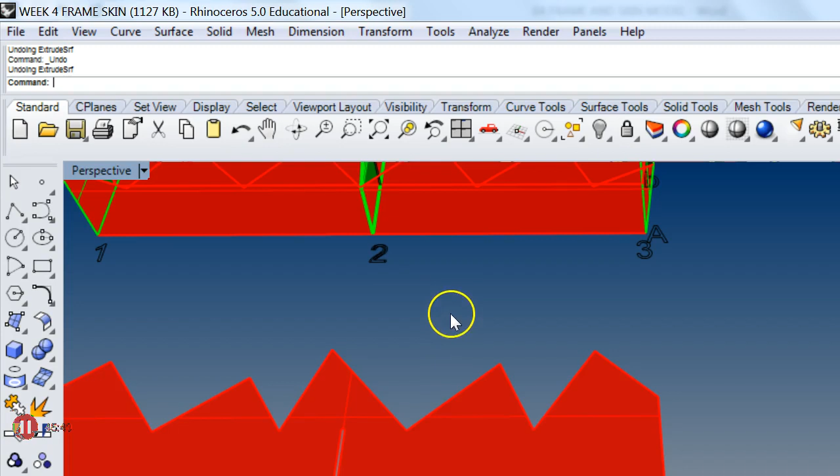So what you need to have for Monday, you need to go through that process so that you can laser cut it. So I want you to draw each one of these ribs. You know, there's not that many notches that need to come out of them. What you could do is look here, and you could just decide, how do I want to do this? So again, maybe since we're subtracting from the bottoms, I think what you need to do is extend an extra 1/16 of an inch and then trim half of it off on the bottom and trim half of it off on the top for each piece.

So to illustrate that point, we would want to do something like this. So I'm going to type polyline, go from here to here, and I'm going to type over 1/16 of an inch. And I'm going to draw it down.

Okay, so I've added that much. And now I'm just going to come over and slice that. So because we're subtracting from the top here, I'll do that. So I'll add this to it, right? And then I'll do the same thing over here.

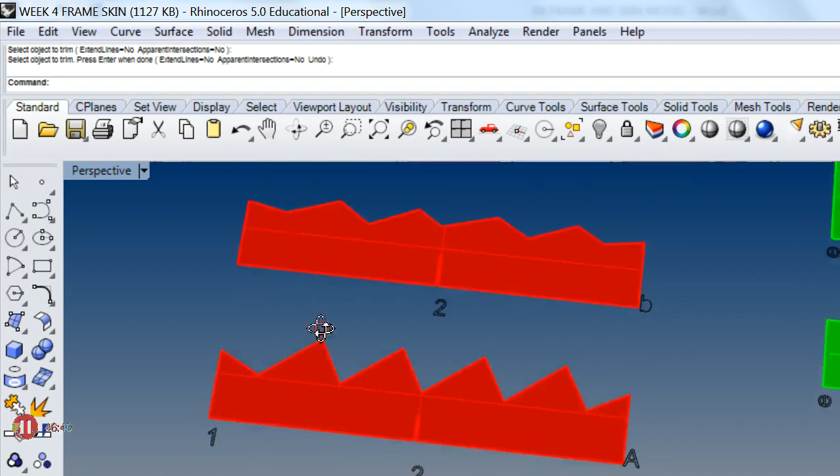And then for A, for rib A, which is going to touch right there, you see that that's going to fit in here. That slot is already here. And then for the ends, let's see, for number 1, we'll do this, it'll work out. So add tops and bottoms to the ends of each one of these things.

And then do you want to see one more way to do it? I don't think it's necessary, and it's already 10 after 9. Quickly, I'll show you another way to do it is to take something like this. Let's take this one and this one. And you could do it in place. So what you could do is intersect these, intersect. All right, you get this line.

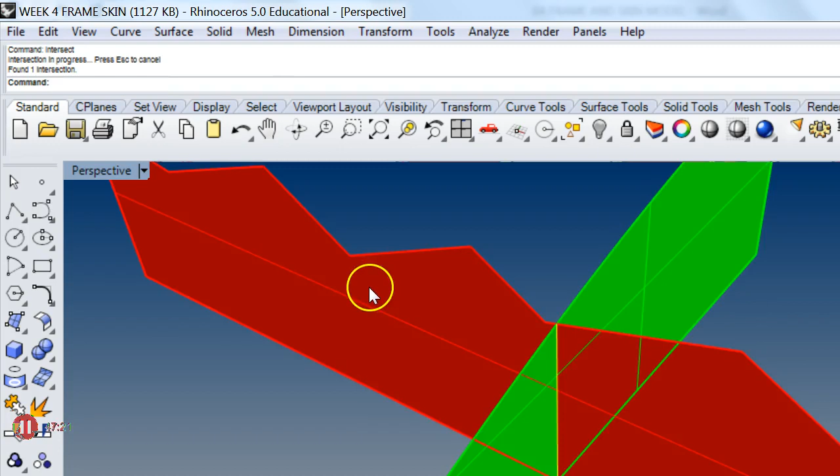And then what you can do is say, I know that I'm doing a 1/16 of an inch. So I'm going to come draw a square. The length of it is 1/16 of an inch. And the width of it is 1/16 of an inch. Right? And so I can move. If I want to center that here, I can just draw an X through it or a diagonal. So I'll draw a polyline.

So I can select this and move it on axis. Right? And so now what I can do is, again, measure to the midpoint. So there's my midpoint. And so I can extrude this up using the box command or the extrude command. Let's do extrude curve. Extrude curve. I don't want to go both directions, no. So I'll come from here to here, and then I'm going to copy and paste this.

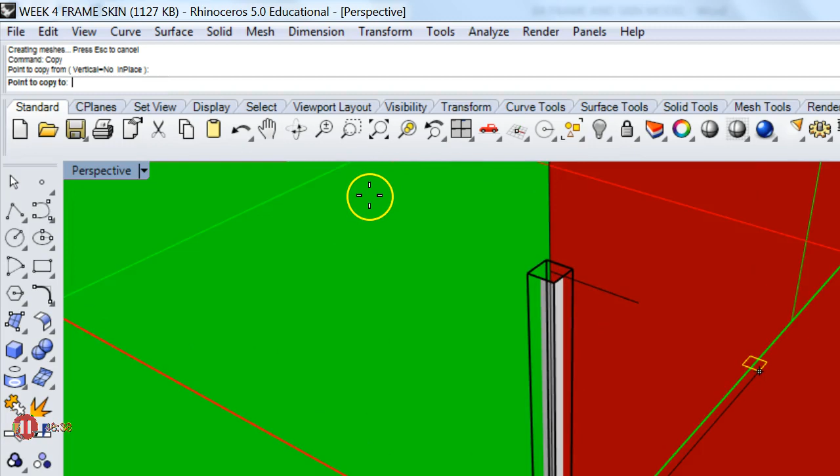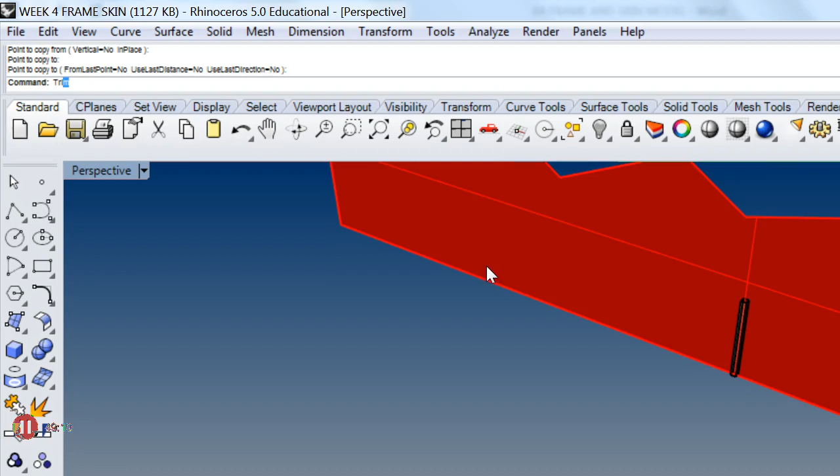Okay, I'm going to take it again. And I'm going to extrude curve. From here to here. I'm going to go beyond it. Okay? And so what I want to do now, I can simply just trim the red surface in place. I can type trim. Cutting objects are this square. It's a little confusing. Maybe I'll copy and paste it over here so you can see. All right, so I can type trim. This is the cutting object. Trim it.

Let's try Boolean difference. Subtract from here with this. Didn't work. Austin, why is this happening?

Hey, welcome to class. Austin is the new TA.

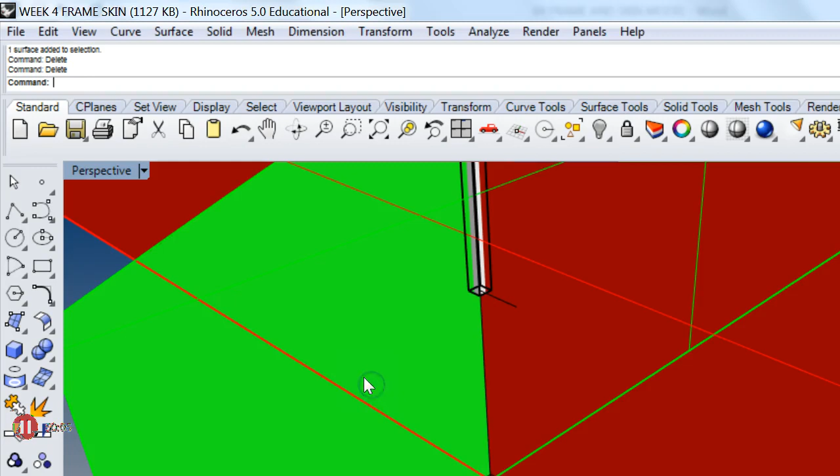Oh, it's not a solid. Here's the problem. I extruded the curve and didn't make it a solid. Let's do this one more time. I think that is the issue. I'm just noticing. So when you extrude the curve, if you're going to do a Boolean, it needs to be a solid. Let's try this one more time. Delete it. Extrude curve. There. See where it says solid? It says no. Let's make it a yes. All right.

Now when I do this, Boolean difference, subtract from this using this. Good heavens. Is this solid? You think it's on the edge? Okay, here's what we're going to do, guys. This really works, and it is pretty useful. Instead of starting at the bottom, do like we did, move it to the midpoint. Okay? So you see we have placed it on the midpoint of this curve.

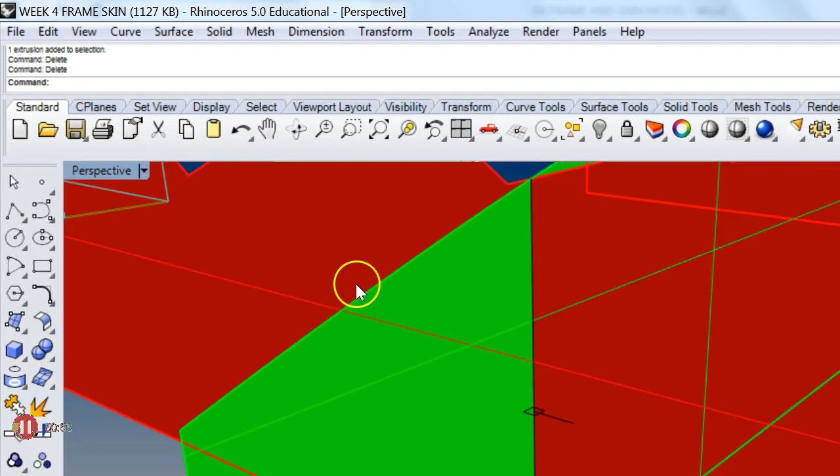Sorry it's jumpy. Here, I'm going to center. Guys, we're almost done. Pay attention. You all see this here? It's on the midpoint of the intersected curve. So I'm just going to extrude curve. I'm going to make it a solid. And I'm just going to go well past the bottom. And then I'm going to go well past the top. All right? Now I'm just going to say Boolean difference. Surface to subtract from this one. Subtract with this one. Jeez.

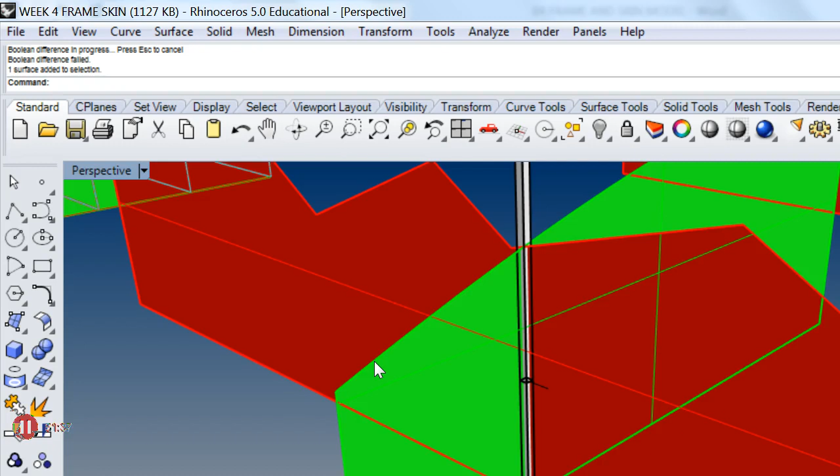Let's trim. So to trim, I can hide the top one and this one. So I'm going to select those, hide them. I'm going to type trim. Cutting objects, this one. Enter. Oh. There we go. Look at that. It did it. This is supposed to be the easier way. So trim, cutting objects, this one. Enter. Oh, for gosh sakes.

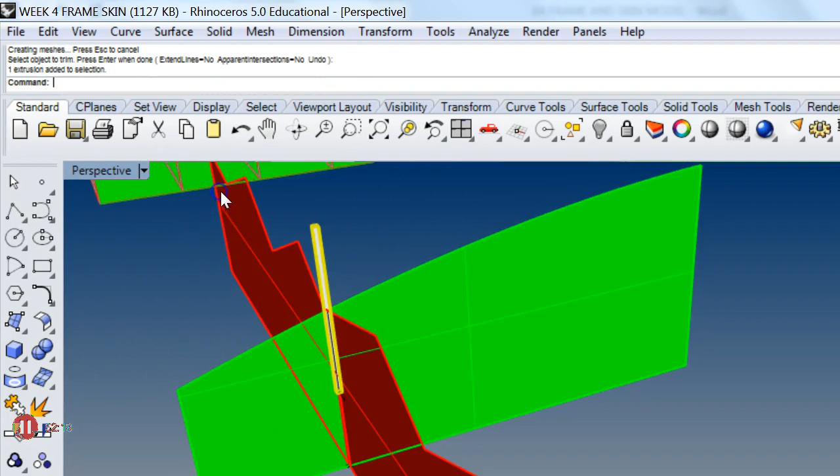There you go. Okay? So that is an easier way if you don't really feel like measuring. You just find the midpoint, extrude up, extrude down, and trim. And you could do that in place. You could go around and do that in place and then lay them down. It's up to you. Does that make sense? It's a little laborious of a process. You'll be grateful when we give you a rib assignment in a few weeks that has like 10 by 10. That's 100 intersecting lines. And we'll show you a faster way to do that. Please complete the drawings and the model for Monday, okay?